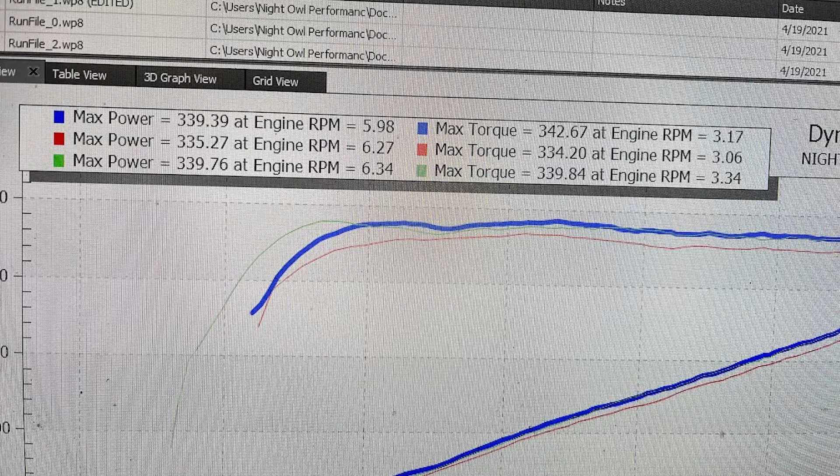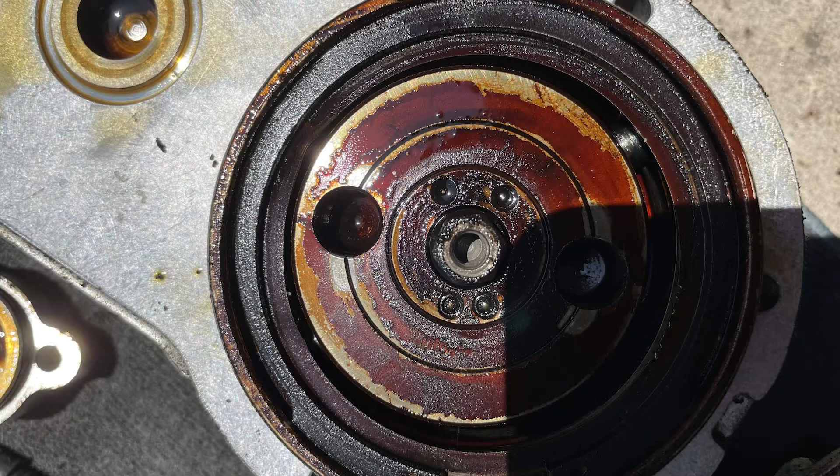I wanted to get a baseline dyno before all the work started, so I went up to Marietta, Georgia to Night Owl Performance, and they did 3 runs, and I topped out at 340 horsepower, 340 torque. That was considered healthy, and as you know, it's typically around 330 on this Dynojet for a healthy motor. So to hit 340, I was quite honestly shocked. But that's great news — it ends up being my motor was not healthy.

We'll get into that later. Mikhail at Mishkin was even saying he thinks the motor was timed a bit wrong, so it was advanced, actually getting better numbers, and the Vanos was able to keep the motor from grenading and hurting itself. So glad I got that done.

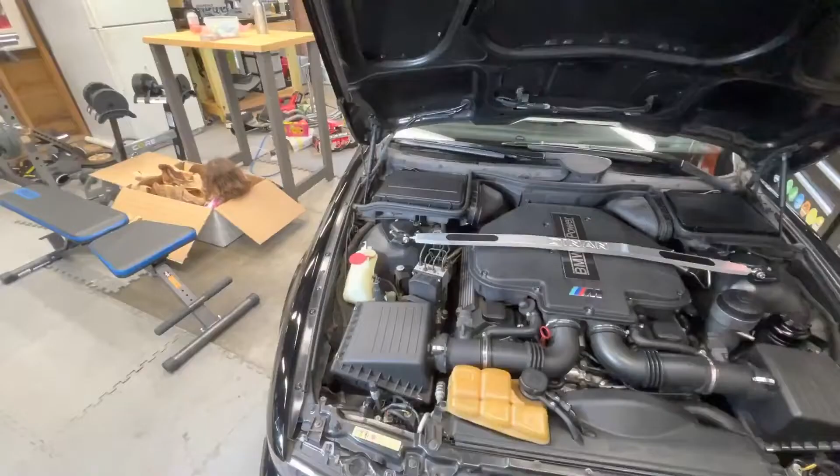So headed into getting all the parts assembled next. Just got a big shipment in from ECS — got the valve, the timing chain guides, all came in that box this morning. So I got a ton of stuff to go through. I'm going to walk you through some of the parts, some of the unique ones.

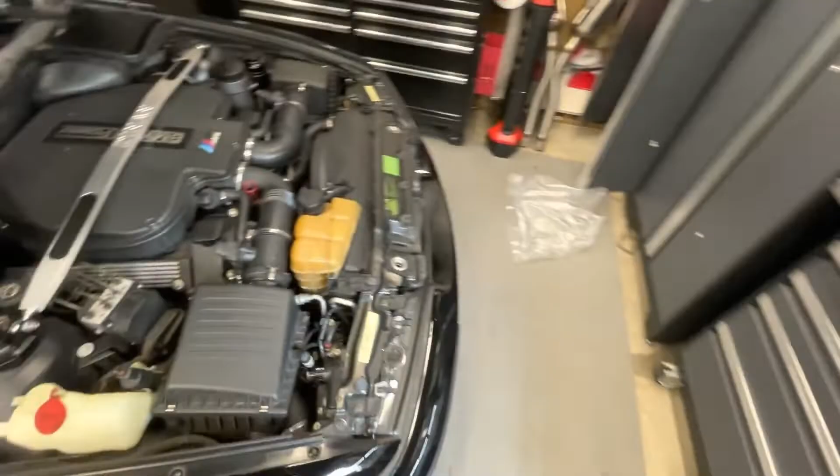Oh, that's awesome. Look at all the parts. All for the timing, rod bearing job, so many things. Got a water pump — while you're in there, right? Gotta take all this stuff off, so good time to do it all.

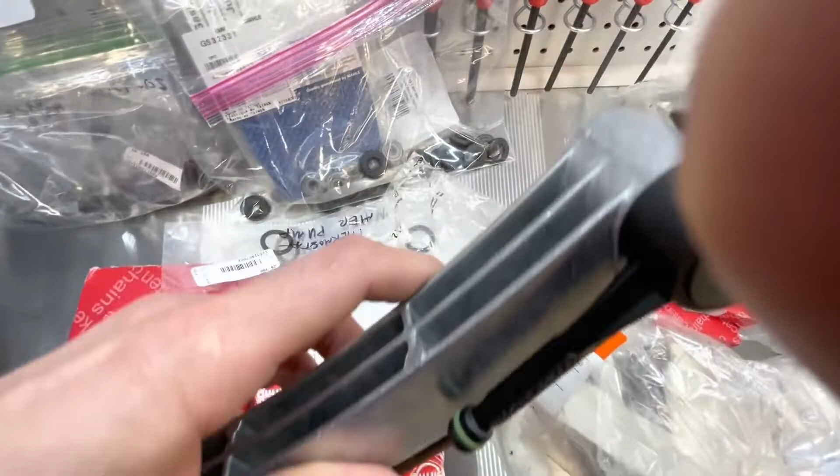So, show you some of the cool things, some expensive things, like this stuff right here. A lot of this, as you can imagine, you can't buy aftermarket. This is the timing chain guide, and this is actually what fails — these black or brown plastic pieces, like these tabs. These tabs break off, and these things just shoot off into the engine.

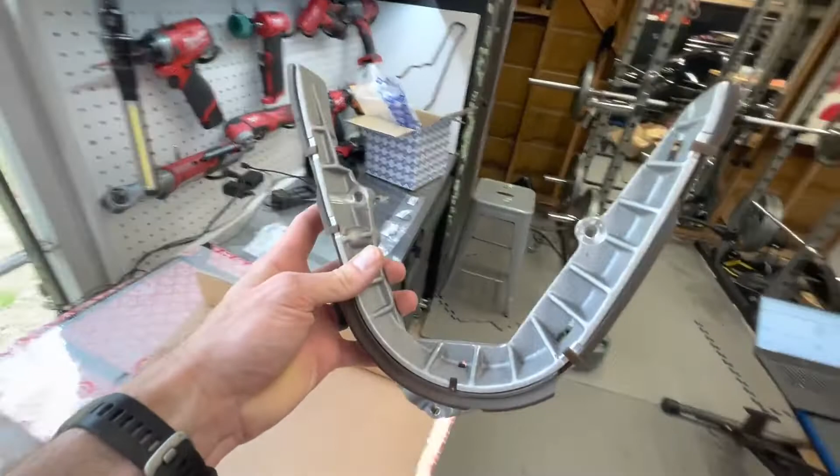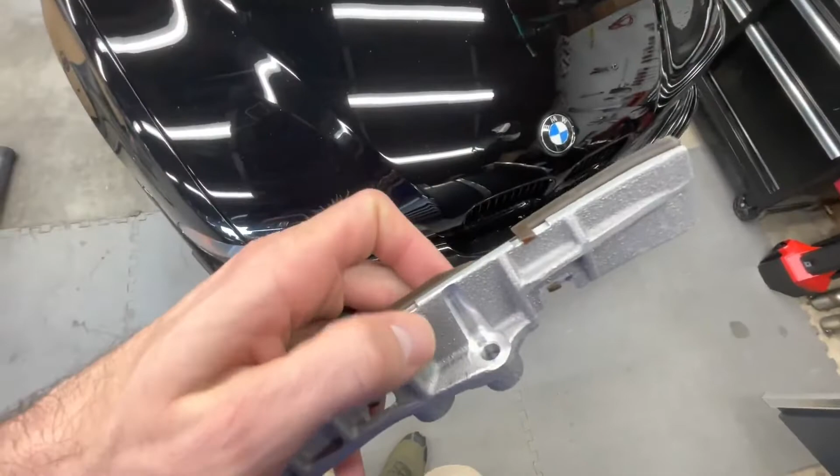Price wise, I think these are like $200. This one's actually all plastic, interestingly enough. This one is a big one — it's at the bottom, as you can imagine. It sits like this in the engine, something like that. But this actually was in the lower pan — all these little tabs broke off, and that was in the lower pan. And that's kind of your first indication, or warning, really, that you need to do your timing chain guide.

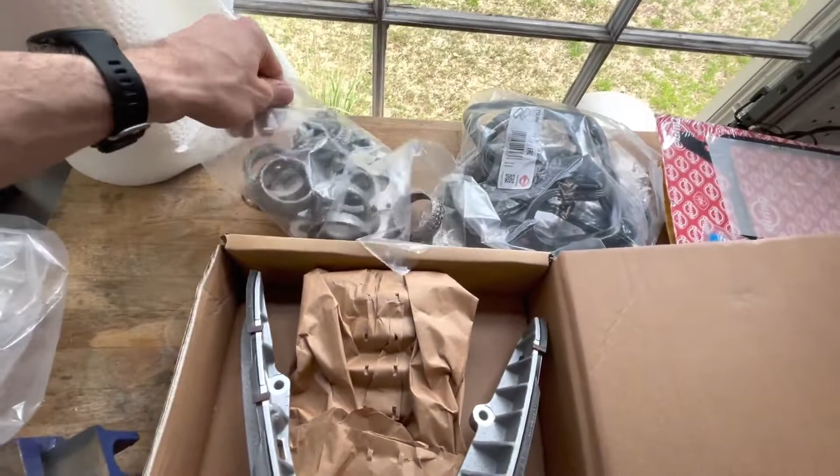So one little thing, if I can get these copper collar nuts — this is the kit from Super Sprint for the exhaust, but the guy installing it, Mikhail, is saying, hey, get these OEM BMW ones. I mean, look, they've got a built-in flange, like a nice seating surface. These were stupid expensive too, man — $4 a piece. I'm sure I could have found something equivalent for cheaper, but I ended up just buying the BMW one.

But to counter that, I actually did source some different hardware for the upper timing cover. These are actually BMW, these black hex ones — they were pretty cheap. But these other ones I got from McMaster Carr, mainly for their strength rating. I think the regular ones are 8.8 rating, and these are a 12.9. So, right, it's like, why not? And all these, 25 of them, was like $7. So kind of a win there.

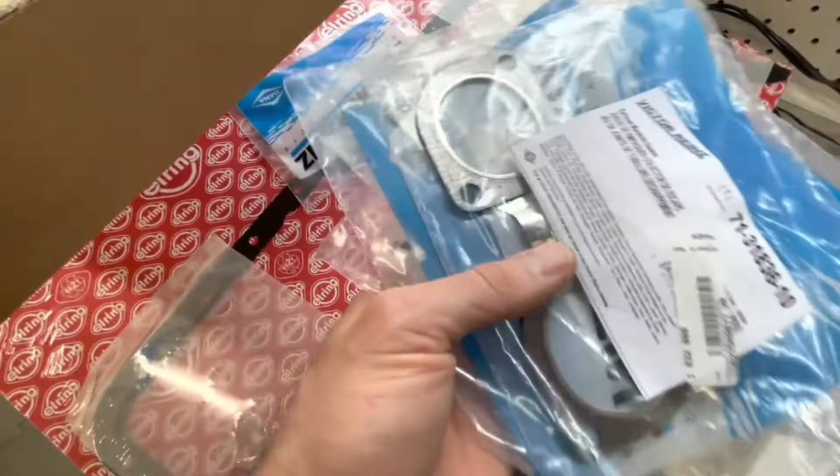But, right, just all kinds of stuff — this is like the spring tensioner, some exhaust gaskets, tons of other gaskets. These are pretty well known — not OEM, as you can tell, from Elring, Victor, but they work well. This is I think the upper oil pan, valve cover gaskets. What else? Got a brand new tank.

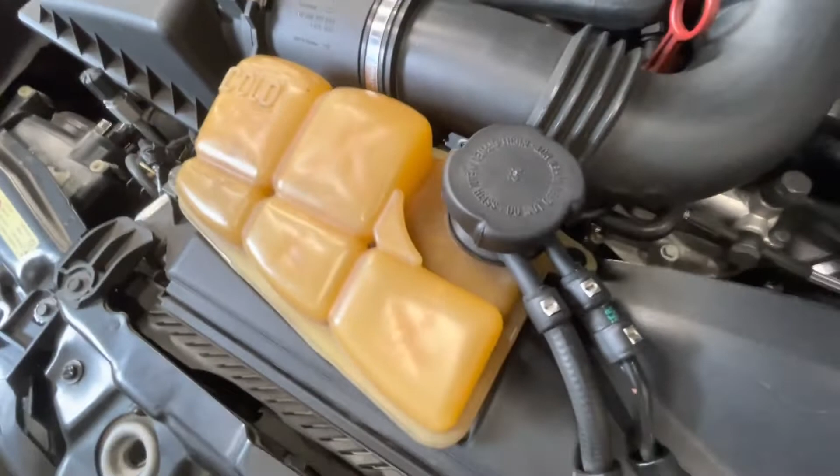Now, this is something people joke about with this car, because as these things age, the coolant reservoir turns this kind of nasty yellow-orange that a lot of people like — I don't know if they like it. It's got like the patina, you know, like the aged patina. But once you throw on this fresh tank, it definitely gives it that like new car feel, right?

I mean, look at the difference — it's gonna look fresh. Again, another while you're in there, all that's got to come off, so now's the time to start throwing new parts on. And those are known to crack as well, so not a bad idea. It's got 150,000 miles on it.

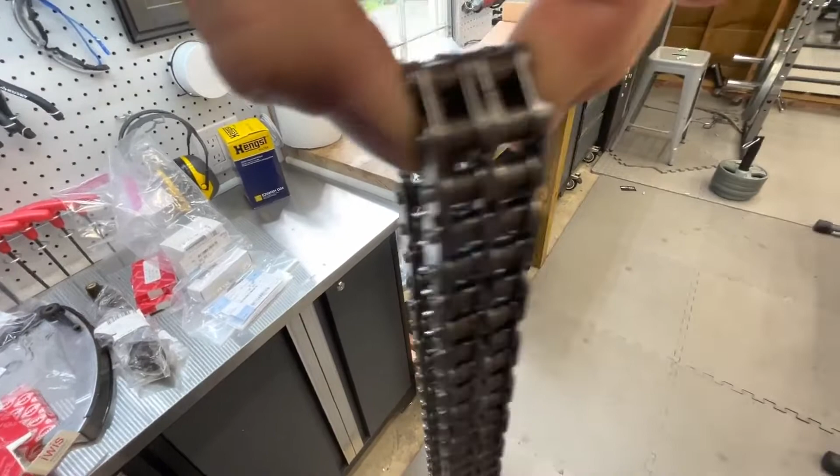You want to see the main chain for the motor? Check out this sucker — freaking gnarly. Look how freaking thick it is. Huge. It's basically like 2 chains put together. Wow.

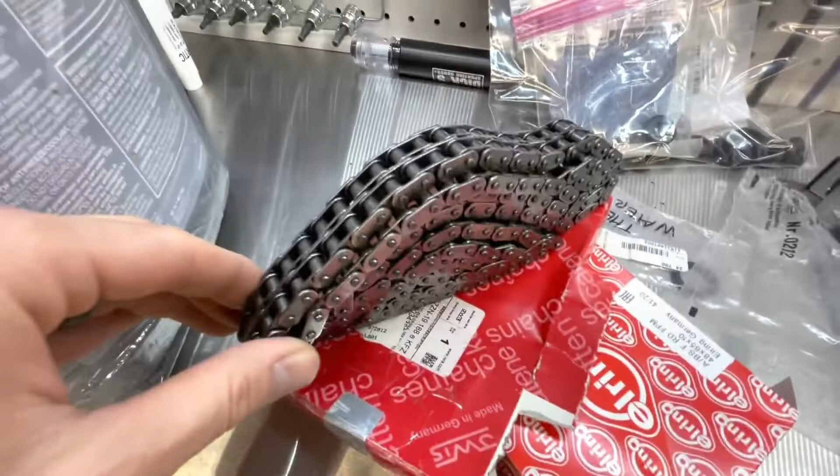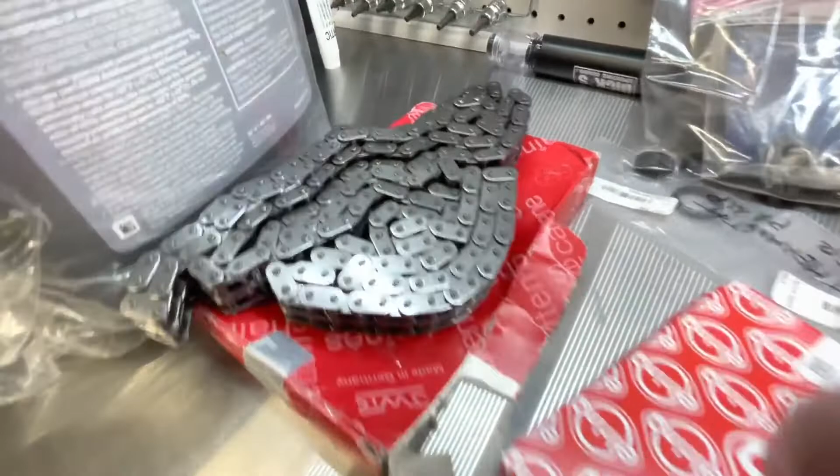This is another aftermarket one, but this is actually the OE part, made in Germany. Surprisingly not that expensive, I think it's like 40 or 50 bucks, something like that.

Some more washers, tons of grommets. That's for the valve cover. Of course, coolant. What else?

Oh, here you go. I think this is, other than the water pump, one of the single most expensive parts. Actually they were out of stock on the other side. This is the cam timing chain tensioner. This is $260, this little part.

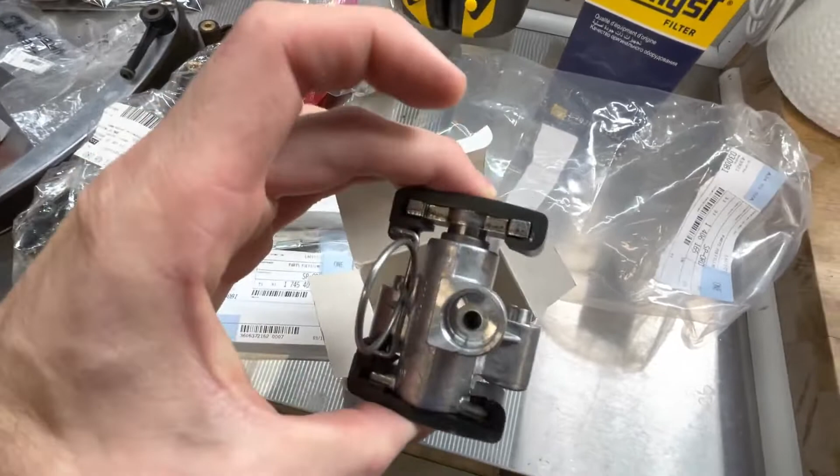Basically it just puts tension on the chain like that, and it slides on that. These surfaces are like Delrin or something. Yikes. That's it. Some Vanos bits in here.

Holla. Hey Norm, having fun in that box?

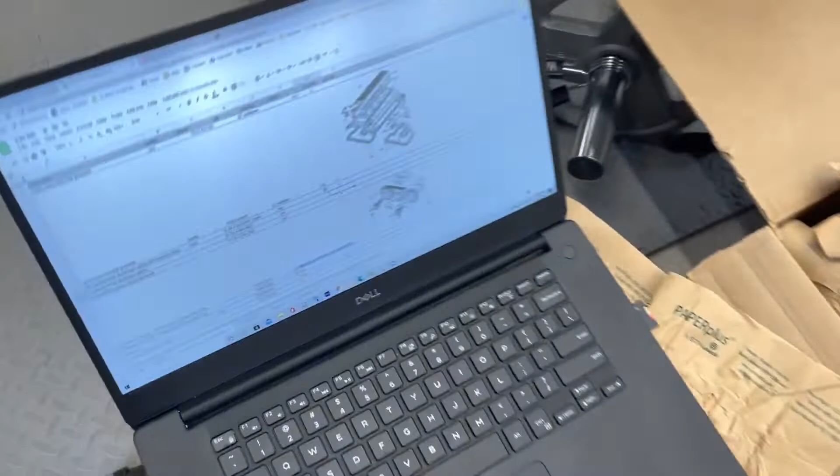So another thing I'm trying to do is track everything I've bought in this spreadsheet. Part number, what it is, even some real OEM images, just trying to keep track of everything.

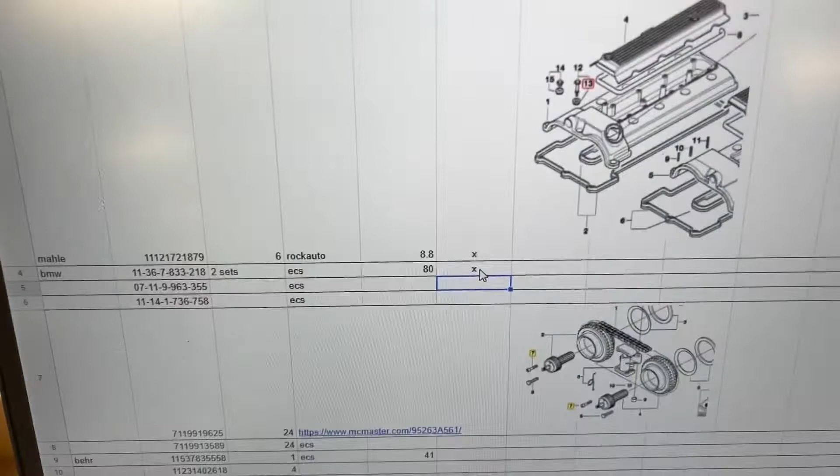But the main thing is, where's my column? In hand. So I'm going out to each part and verifying I have exactly how many I need, and it's the right part number, and then I'm checking this. And that's huge, because sending this down to Florida, I've got to make sure I have everything, because we don't want one part to hold us up. So that's been kind of painstaking to go through every little thing.

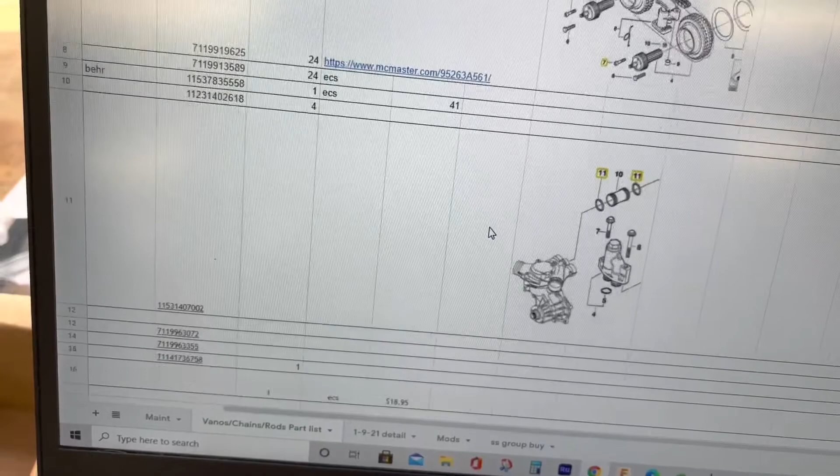But yeah. All these things, oh my God.

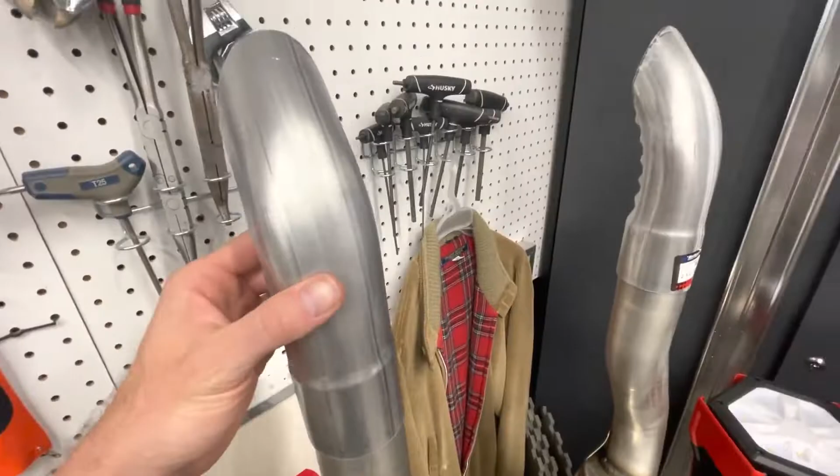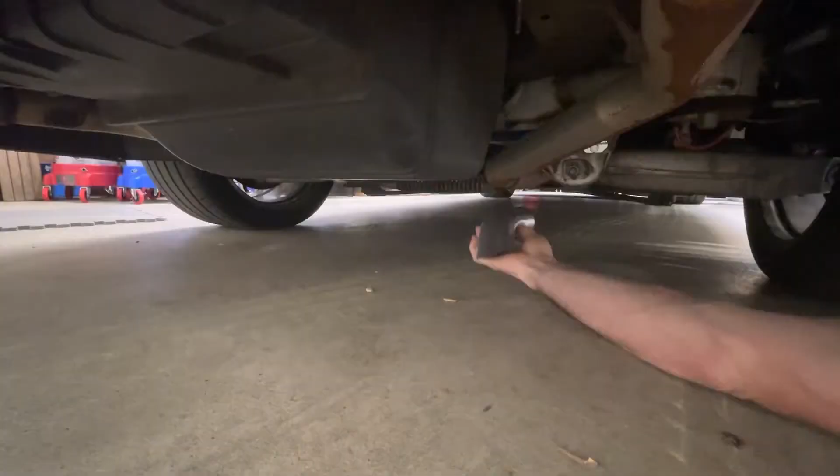So this video I created for Mikhail at Mishkin Motors, basically because I didn't have mufflers at the time. We needed a solution to turn the exhaust down after the X-pipe. So these turn downs were to basically accomplish like a really crude muffler delete. Pretty tight, and I'm not sure where that X-pipe dumps out, if it's right near the diff or pushed back. So this may be pretty close to hitting this.

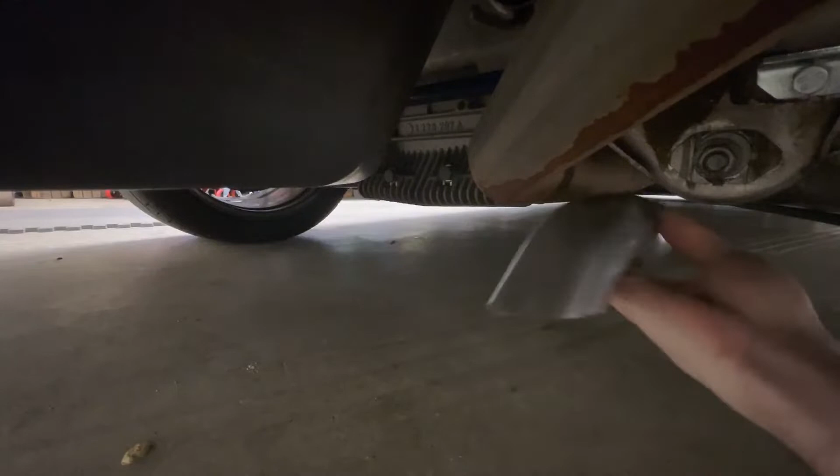Yeah, I'm just kind of worried about melting plastic. I hate for you to have to hack on stuff like this, but there's plenty of material here to cut this down, probably to make it fit better. Anyway, that's one thing I thought about that might be an issue.

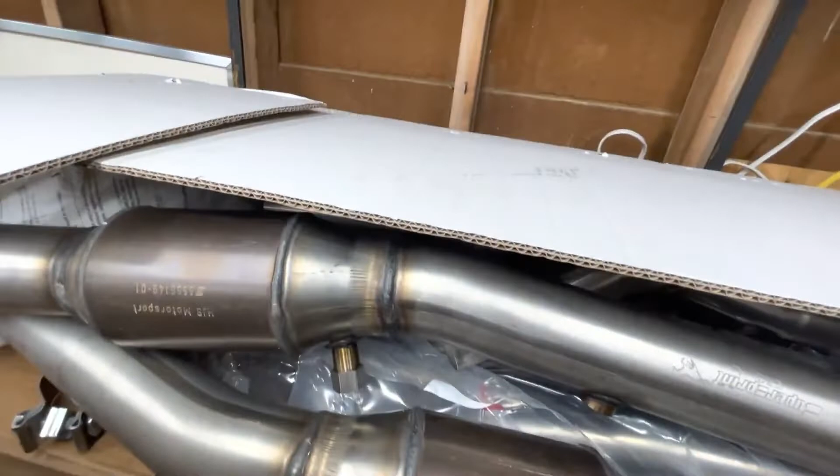The sport cats in here, as well as all the header piping, I inspected everything to make sure nothing was bent or broken, and all the welds looked good. So that all should be good. I also kind of assembled it together to make sure all the pipes were there.

Orlando, here we go. So I basically did this 2-week journey where I went and dropped off the car, flew back, and then did the same. Flew down there, drove the car back. So here I am from Atlanta to Orlando.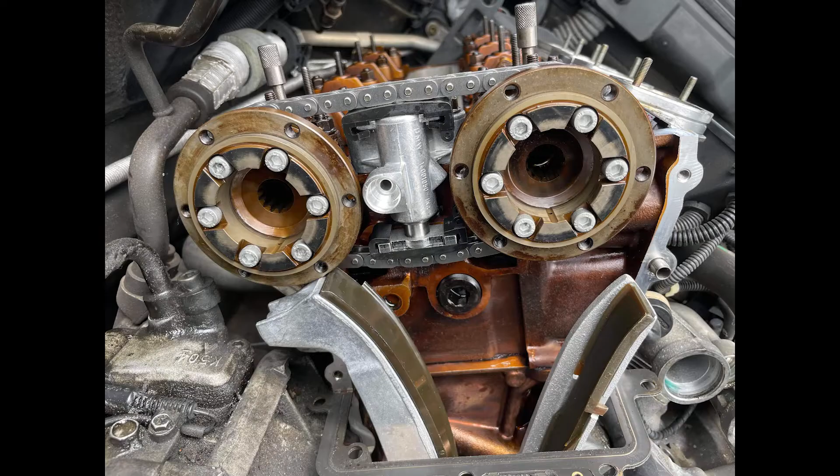I mean look at that, it's baked. So I'll get into that Vanos unit later. It was toast. But here's some of the new parts: chain guides, that new hardware we talked about, new chains, new and old part.

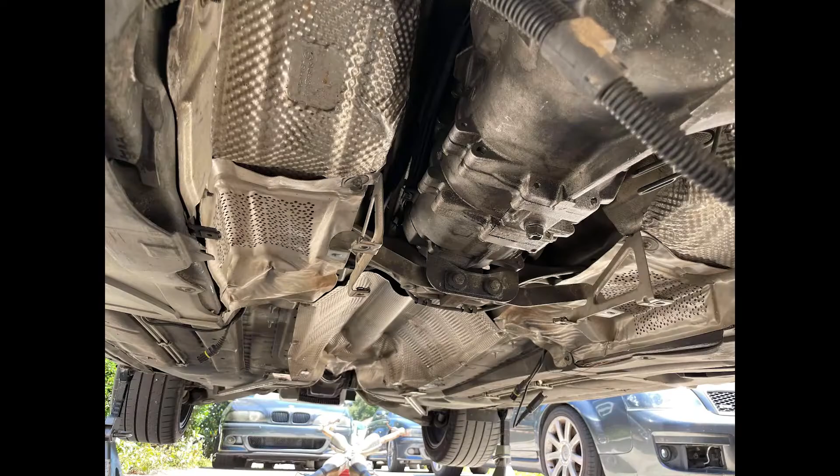So exhaust removal, totally gone. See Mikhail's other toys in there. There you go, there's those big flange nuts. Got the collectors in. It's like assembled, everything in there.

So here are those turn downs. You can kind of see how Mikhail was able to get them in there, kind of avoiding that plastic area.

We're headed home, so the intro clip is me headed home. Yeah, that check engine light was actually for an O2 sensor, the high flow cats kicked that off. I was able to code that out later, but the next video is going to be the Vanos description of what happened. I ended up taking it apart to see what was going on. So see you next time.